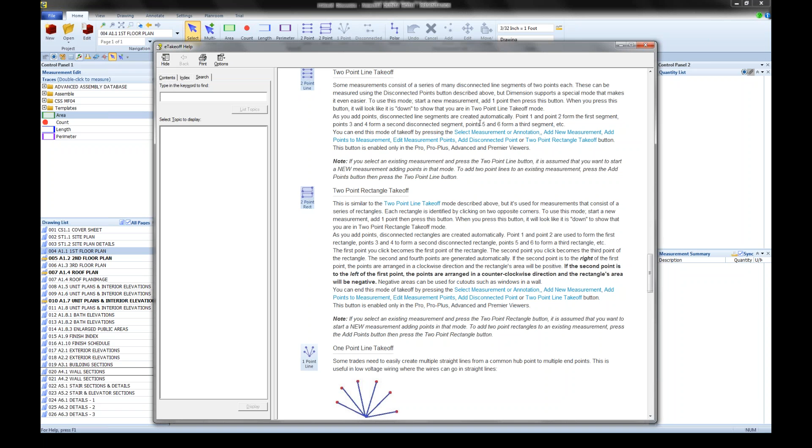If you've used search tools before, we will set you right into the tool or the help system at the most appropriate level. You can also use that on sections, like the Takeoff section, or even on the tabs, anywhere you want. Want to know about the settings tab, how does that work? We'll take you into the settings tab, etc. So a very powerful tool that gives you much more help, more specifically, much more quickly.

Then we also use what's called the Quick Access Toolbar. It's a Microsoft tool that isn't always activated in all software, but we think this is a very powerful tool because it enables you to learn the software. Once you learn it, you can optimize some shortcuts so you don't have to move around as much. Again, these are all things that help you use the software, and as you get used to it, help you become even more proficient.

So the ribbon bar concept is great, but you do have to move to different tabs to accomplish things, and sometimes that gets in the way. What the Quick Access Toolbar does is, for instance, if I'm at settings and I use the Edit Layers button quite a bit to turn this dialog on, I don't like moving back and forth all the time. So what I can do is put the cursor on the button, right-click, and add it to the Quick Access Toolbar.

And now there it is. I can be in any tab, on my home tab, where I'll probably be doing 90% of my work, and jump to that button anytime I want as a shortcut. You can move these around, and notice even the tooltip is still active on those buttons. Of course, you can edit these and move things around. So a nice little touch, something that makes your software more useful to you down the road as you become more proficient.

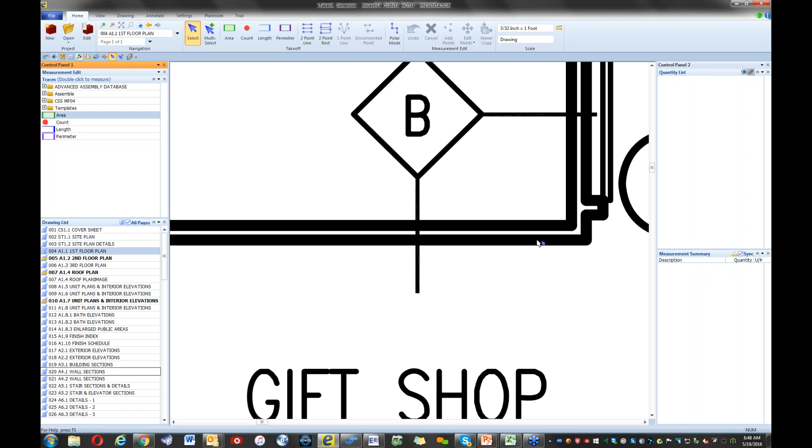I'm using PDF drawings, and if you've ever used a TIFF drawing, you'll notice that when you zoom in, the lines get very fuzzy, you get a lot of pixelation, things break up, etc. Here with the PDF, you get very tight lines, very tight formations all the way through to the zoom level, so you can be more accurate in your takeoff and pointing.

So again, you simply double click over here to change a drawing, for instance. This becomes a very powerful way to use the system effectively so you don't have all this delay time up front. Then next we have the navigation section.

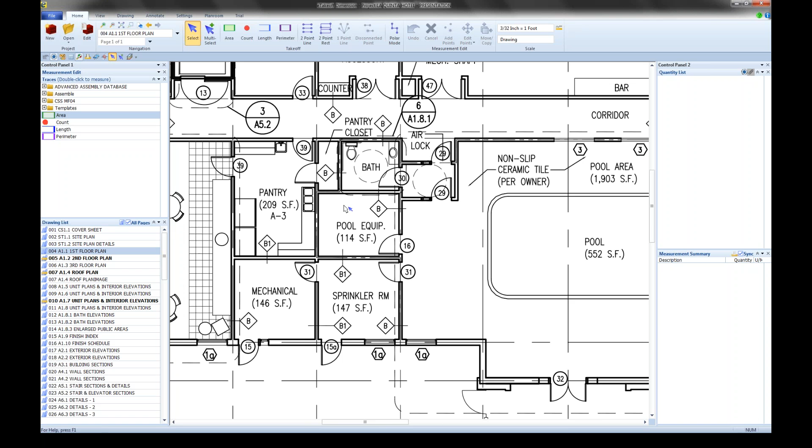There are many navigation controls here, but you may not even use most of them. You can simply get around your drawings very quickly by putting the cursor wherever you want and hitting the wheel to zoom in. That's a very quick way to go in and out of the drawing and move to different positions. If you're zoomed in, you just click the left or right mouse buttons, the cursor changes format, and then you can scroll and pan across the drawing.

So very easy to get around, and that really constitutes most of your navigational work. Although, as I said, there are other tools up here if you want to use them. The takeoff section gets into how we do our takeoff, and the measurement edit section is how we edit measurements after the fact if you'd like to change things.

And then here's your scale. The scale tool gives you standard scales you can choose. You can set up a scale to be a known distance, and then have the system automatically scale to that. You can normalize the scale it generates so it's very close to a standard scale, because you can't be absolutely perfect in how you click on these dimensions. It will automatically scale to a normal scale close to what you generate, or you can just type in the scale. A lot of different ways to get scale into the system.

And then just in terms of use, when we look at how the system is used, we try to set up an interface that makes it easier for you to understand the workflow just by looking at the screen. So the drawing is always in the center, and then we have two control panels. These can be moved—you can undock them if you wish, move them anywhere you want, even put them on another monitor.

We have four of these control panels. The system starts up with two of them, and you can have two more. You can add many different controls and turn them on and off for all of these control panels, so you can customize the look here.

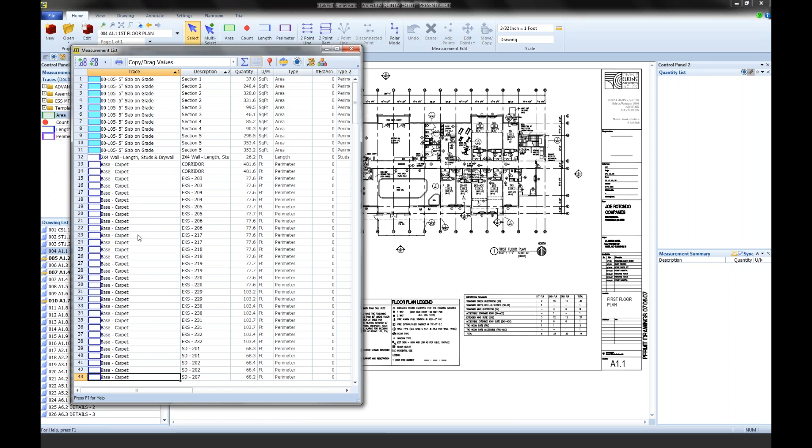So you can create an entire list of reports, different ways to look at your estimate and your takeoff. That's all done in the measurement list, and this crosses all of the project boundaries—it goes across all drawings and shows you all takeoff on those drawings.

So again, the takeoff methodology is clockwise: you take a drawing, select it, double-click on it, select a measurement, go do the measurement, the result is over here, and then going clockwise we end up with the summary of everything on that drawing in the lower right corner. So that's an overview of how the system's used.

It's actually pretty easy to get around, and once you use this for a couple of measurements, you'll start feeling quite at home. So let's start and show you a little bit of what we do here. The issue with software is that the point is to make your life easier.

We're not here to try to make your life more complex with a tool that is difficult to engage with. The idea is to make your life easier.

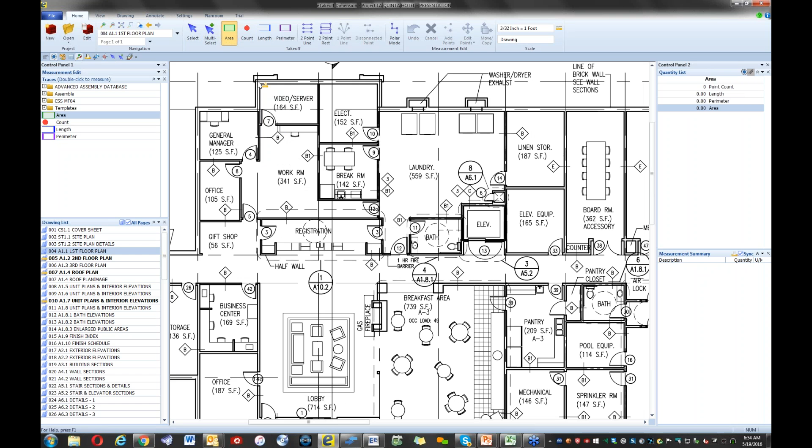I'm going to start with a simple area, and there are many different ways to set this up. I'll just draw a rectangle here. You'll notice when we do a measurement, I have this set up in a freehand form, though you could have rubber banding, or crosshairs—many different ways to set this up. You can set it up so the system automatically goes into a snap mode with different degrees, or you can make it freehand with the click of a button.

This can all be customized by you. You can set up a default so you're always in snap mode, for instance, and then revert with a click of a button to freehand. When you're finished with the measurement, notice this shortcut: I can go out and start another measurement, which will terminate this one. But if I press the Esc or Enter key to stop the measurement, then we are complete, and the results are shown in the quantity list.

So you can see here I have 4 corners, a length, a perimeter, and an area. We always give you 4 pieces of information. And you may ask, what's the difference between the length and the perimeter?

If we look at a room here, for instance, when I start the measurement, notice as I go around, if you're looking for a point, you can simply hold the cursor down and it will let you get more accurate in your measurement. It'll zoom in for you automatically if you want to do that type of thing.

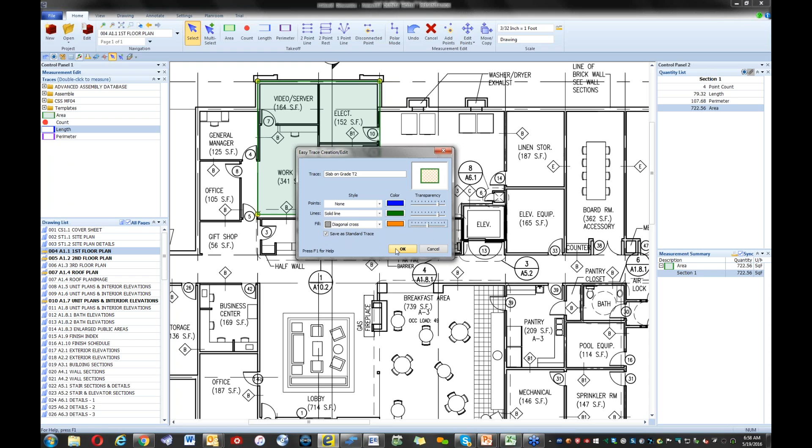What that lets me do is say, well, this is an area, but it really is slab on grade, type 2 for instance, and I'd like to make this diagonal lines, and let's use orange, and modify the transparency a bit. Now when I click OK, this is instantly transformed.

You'll note now it is slab on grade type 2 under section 1. However, what's most important is I've now created a brand new takeoff measurement, a trace we call it. This trace can be used across all projects. It's permanent, it's part of your database, and you don't need to do anything else. You could just use this immediately somewhere else in the drawing.

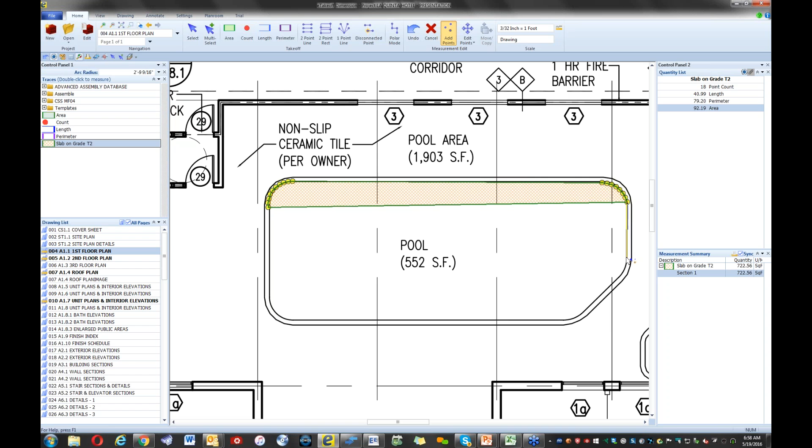Let's go out here to this pool and just double click. Now instead of using the area measurement, I have a new measurement I can use, and we simply go around the new object, the new takeoff. By the way, I'm using the curve capability, so I go to the beginning, the middle, and the end of the curve, then just press the C key, and the system will calculate the curve for you. You have options to set up how many samplings you want around that curve, etc.

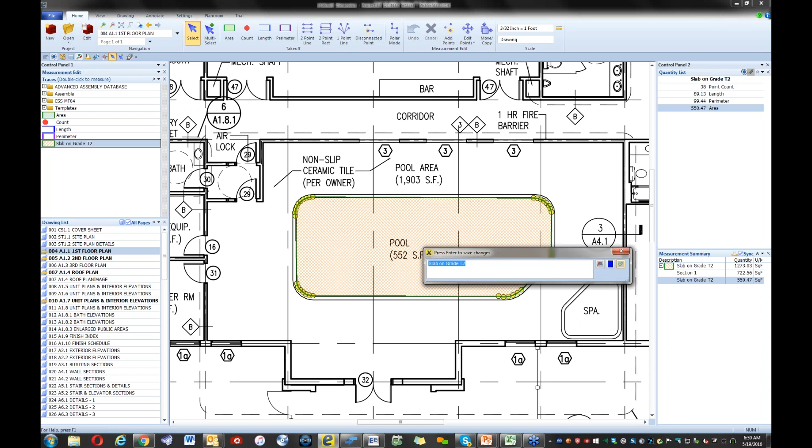There's our pool, and then I can press the D key and say this is section 2 or whatever. Notice now I've got section 1 - double click on it takes me to that measurement - section 2 takes me to that measurement, and I'm already moving along with my own customized takeoff trace. So very quick to make modifications, change things, etc.

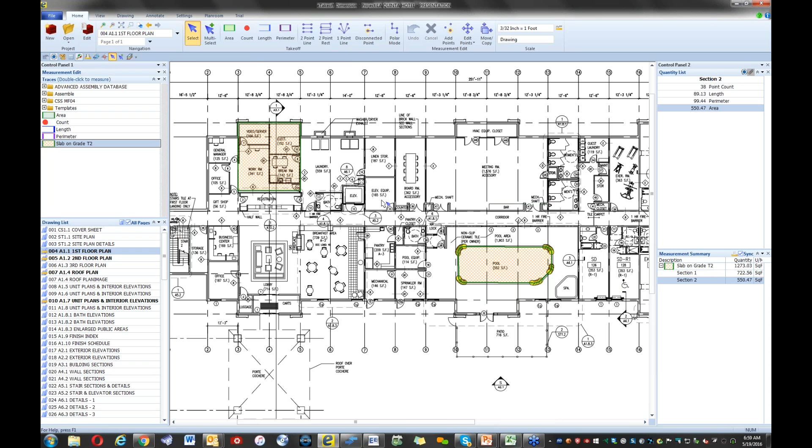Now let's get a little deeper and look at how we can make this more powerful. It's very easy to do takeoff in terms of tracing things. All these products trace - they all do it, or they wouldn't be takeoff systems. So I can't draw a rectangle any faster than the next guy. However, what I want to show you is something not easily available in other systems, and that has to do with our assembly capability.

So let's go to frame and drywall, and I'm going to grab this 2x4 wall. Notice what happens as I do this wall: instead of just point, length, perimeter, and area, I have several other parameters now. I put in the wall height, maybe 24-inch stud spacing, and maybe number of sides too. And let's put in a sheet size, and we will generate the track, the studs, the drywall, and the sheet count.

So you immediately begin to see the power of having a simple takeoff start generating complete estimating assemblies for you, and generate anything you want that you can mathematically derive out of the information at hand. It's a very powerful tool and enables you to do much more powerful takeoff, generate more items.

At the same time, if you're using Excel, we can show you how you can export this into Excel and get the best benefit of having all of this information out there. Many systems will generate just these quantities, and you have to do all kinds of crazy work in Excel to get something done. Here, we generate inside the system, and it's much easier to take that out to Excel if you want, or if you're using an estimating system - and of course all of that stuff transfers, such as Sage.

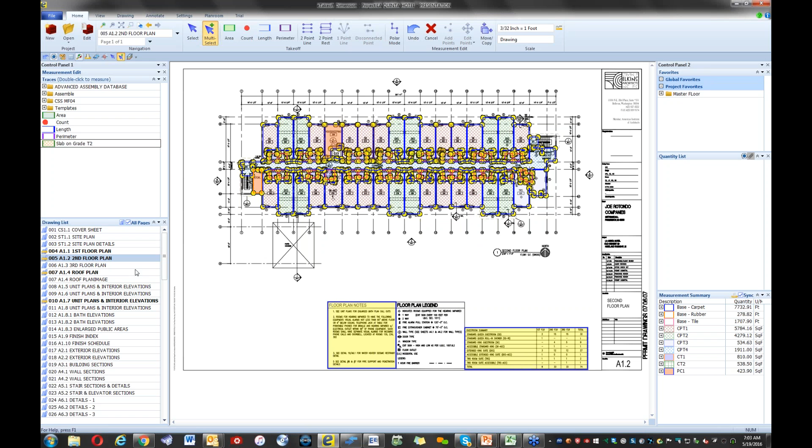And now I have an identifier which represents all these measurements. If I go to the third floor, let's zoom in here a bit, I will grab this entire set and simply drop it over. You see the outline. Drop it in place, and all of those measurements will be transferred over to the third floor. They're all individual, all still there. You can grab each one, modify it, do whatever you want with it. But it's a very quick way to move things around or duplicate things in your Takeoff.

And this can be used in a variety of ways. For instance, you can also go to annotations and say we want to put in a text. Up here, let's say this is approved. Now, once I've used that text here, I can grab it and drop it into the global favorites. Project favorites means that everything you've done here is saved so it can be used anywhere on this project.

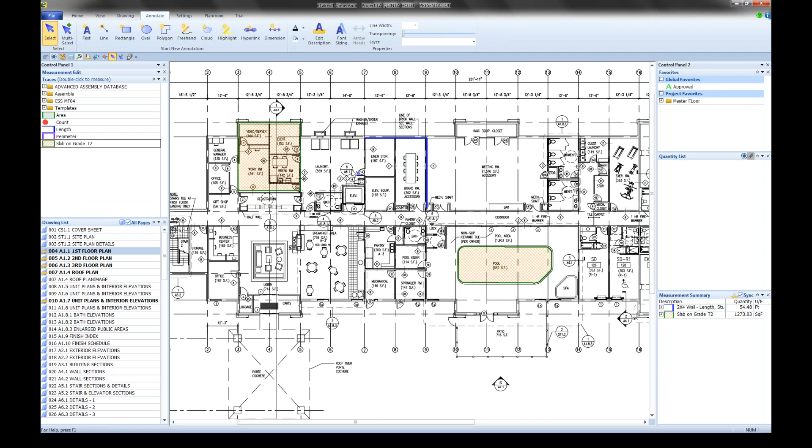However, the global favorite says use this across projects. So as I move across projects, let's go to a different floor, a different Takeoff. I can simply drop this wherever I want, reuse this, build a complete library. Those will be there across all projects. Once stored in the global favorite, it is not relegated to just this project as the project favorites are.

And then another use for the project favorites - when I did this Takeoff, let's go back to our frame and drywall. Note, when I do the Takeoff, I have all of these answers that I need to provide. And as you do that, that provides an opportunity for error, because anytime somebody's typing in things, you've got key transposition and all of these things that might affect your accuracy.

So to remove that area of error, you could simply take that standard wall you're going to be using, grab it and drop it into the project favorite, and say that this is a standard wall type 2 or whatever. Now, as I do my Takeoff, instead of going over to the standards and grabbing the standard trace and double-clicking and having to answer all these questions, I could now use this wall definition, just double-click over here. Now when I do my Takeoff, notice the Takeoff is there, everything's taken off, but all of the answers have been provided because you're using that as a standard wall type, so you no longer have to answer these variables for this particular Takeoff. Saves you a tremendous amount of time, but also saves you from errors, so that's a very powerful tool also.

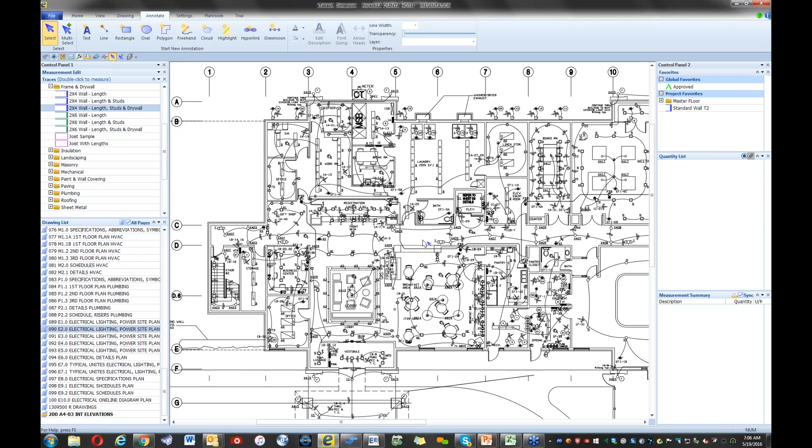Now, going a little further, we'll talk about some other tools. For instance, if you count a lot, depending on what kind of contractor you are - if you're a GC and self-perform, or say you're electrical and you've got Takeoff that you need to perform by counting objects - then it becomes very important to have a tool that lets you do that in a productive manner. The trick with these counting tools, called auto count, pattern search, etc., is the science is inexact. You are not working with a CAD drawing with objects that can quickly be found. You're just working with ink, black on white, really just ink. And so the system has to analyze the drawings to find the matches for you.

And many times as you do that, you'll find some systems simply return the count to you - here's the count, and you have to trust it. As an estimator, it's very important that you can quantify what you see, use the information, trust it, and then go forward. If you can't trust it, the benefit of the automation doesn't help you much. But we know that this is a task that requires an estimator's interaction.

So we're on a drawing here. Let's say that we want to find - let's see, what should we do? Let's go out to fire and security, and we will look for smoke detectors.

So what I'll do is go to our pattern search, auto count, different terms. I'll create a search rectangle, or I can do a polygon to isolate very specifically the parts I want to search. I could search a whole drawing, but then I'm searching all of this text too, and that's just a waste of time.

So we will search by creating a search rectangle, and we'll call this the master search area. We'll tell the system to search within the confines of that. Then I can turn it off by clicking outside of it, and bring it back if I need to. But that's the search area I'll use.

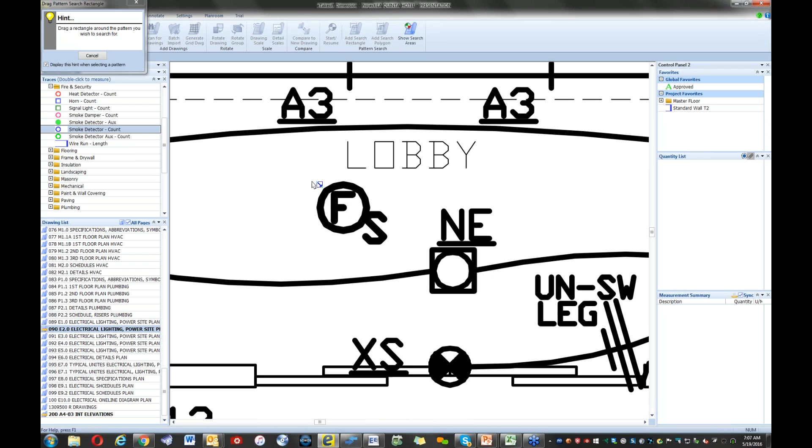So now let's start our search. It says draw a rectangle around the pattern, so we'll zoom in here. Here's a smoke detector for us. We draw a rectangle around it, and the system shows us the pattern we are going to be searching for. I'm going to search immediately.

We can also search in the background, I'll explain that in a bit. We'll use that master search area. We already are looking for smoke detectors because that's where I was when I started. If I click the select button, I have everything available, all the measurement types, and I can count whatever I want to specify. So I'm ready to search.

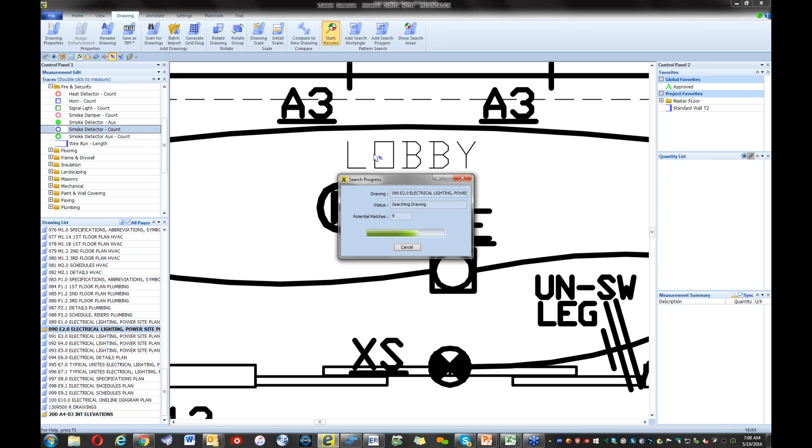So I start the search, and the system goes through and finds every match it can, and presents them to me so I can see visually what I found. In this case, as you look through the list, we have one that's very close but not the same as the heat detector.

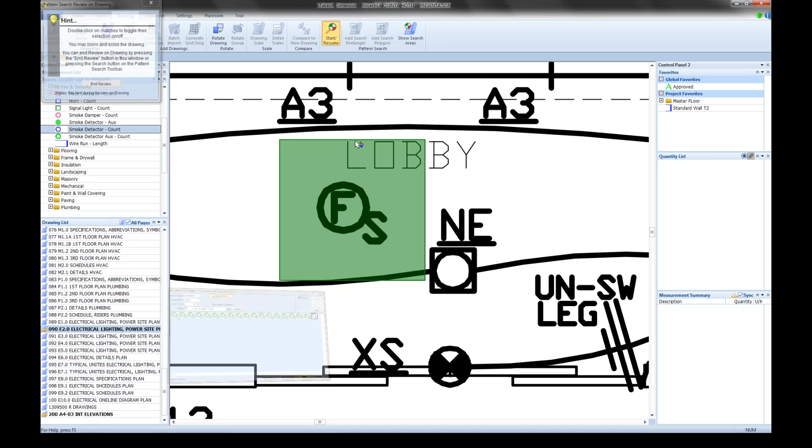So I'm going to turn that off, just click on it. Everything else seems to look good, but I'd like to review this on the drawing, so I get a chance to go out and look at these. You can see wherever they're found - this one here, for instance, in red is that heat detector. I can double click and turn it back on or off, but that's in red because we turned it off.

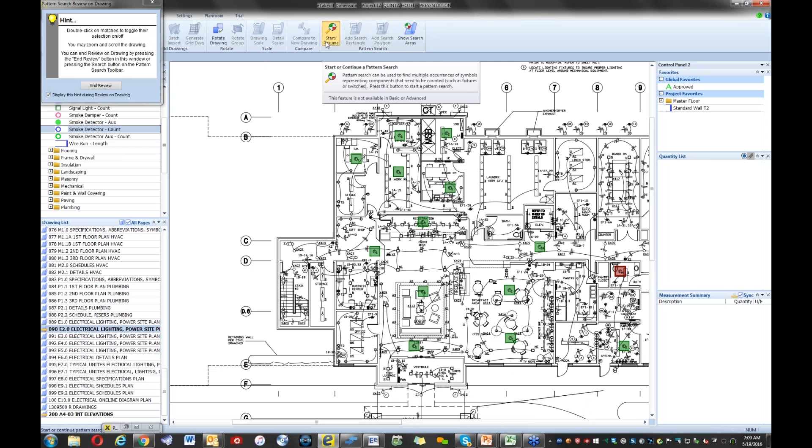So you see every location the system found, but we want to go a little deeper. Let's go back, just resume, and click the button again. The last thing we want to do is analyze this in more depth. So we have a very unique tool here that allows you to expand the display area. It doesn't change the count or the results of the count.

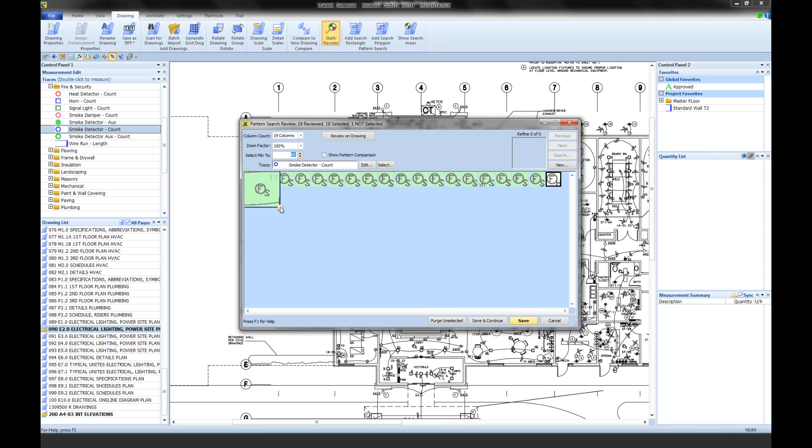It says if you've got wire attachments or cables or something hooked up to a fixture, and you want more information about it, you can expand that so we can see more around each of these things we found, and analyze them in more depth to see if there's something surrounding it that's important, whether it's cables or whatever it might be.

In this case, as you search through, you notice one of these is different from the others. Again, because I made my search so tight, you miss this SA, which is really an auxiliary smoke detector. So I need to turn that off too. The rest of this looks pretty good.

Now, in a lot of systems, when you save this you would then have to start completely over to search for your heat detector, and then start all over again with your auxiliary, etc. But in our case, we can say, let's save and continue - save everything you've isolated as a smoke detector. There's your count. Then we come in and say, let's look for the auxiliaries.

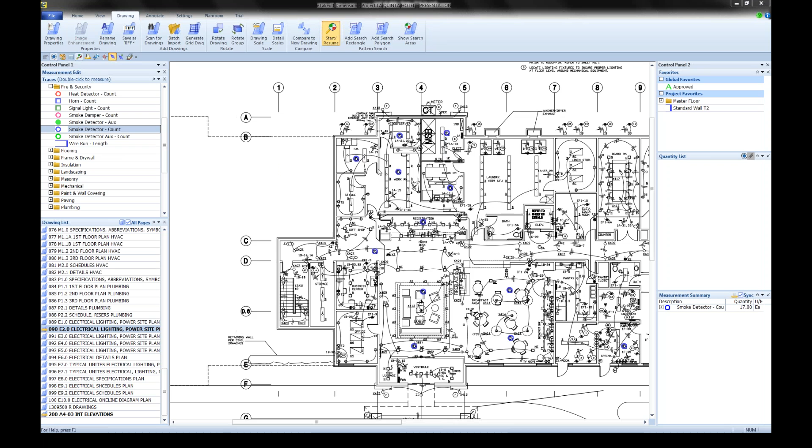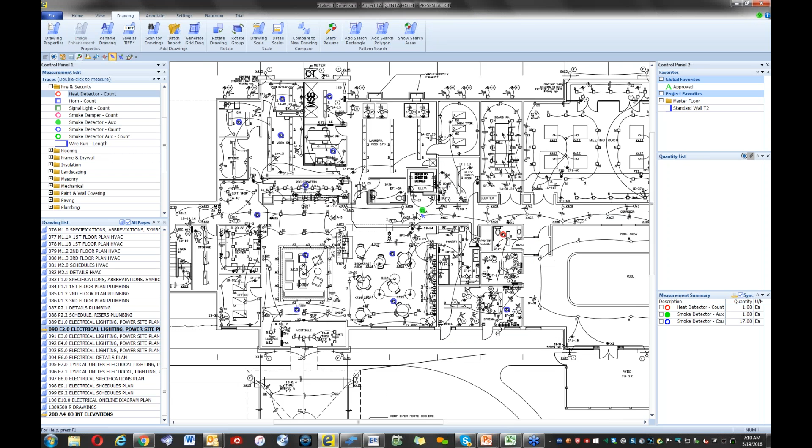So I'm going to go out here and select my auxiliary smoke detector, and we will save those. I'm left with my heat detector, and I will find my heat detector symbols and save those. Now we have our counts, and you can see across the drawing, color coding and so forth of all the symbols it found. This is a very powerful way to do a search, and not many systems do this in the same manner.

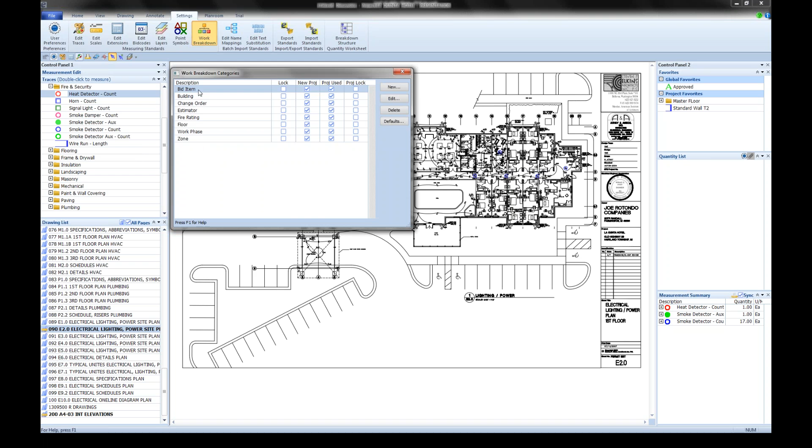Now maybe just one other thing here. Let's look at WBS codes. We have a very powerful tool for setting up WBS codes that lets you code everything you do in Takeoff with different codes that you can set up: bid item, building, change order, etc. And as you take off, you can create and open the work breakdown tool, which lets you see everything you're doing in your Takeoff, and allows you to code it.

So if we go back here for any of the Takeoff we did, you'll see the master list of work breakdowns. If you want to isolate these differently by job, you can do that, so you only see a subset. And then you can fill this in either automatically, by having it default based on the measurement you're using, or you can fill them in at the time you do the Takeoff.

So you can go in here and say that this is change order 2, or whatever it might be. You could also code this differently. You could say maybe this is... let's do a zone, 35 or something of that nature, and code it.

And as you code this information, it's encoded in all of your Takeoff throughout the project. You can then sort this down and look at it in different ways. Let's go to the second floor and select very quickly one portion of the Takeoff, and for that particular section we want to say this is zone 55 for those objects. So these are all categorized as zone 55 at this point.

I'm going to turn off our favorites here, and I'm going to open up the filters. So the filtering now says... and we'll turn off our coding here, and go back into single selection mode so we don't see that anymore.

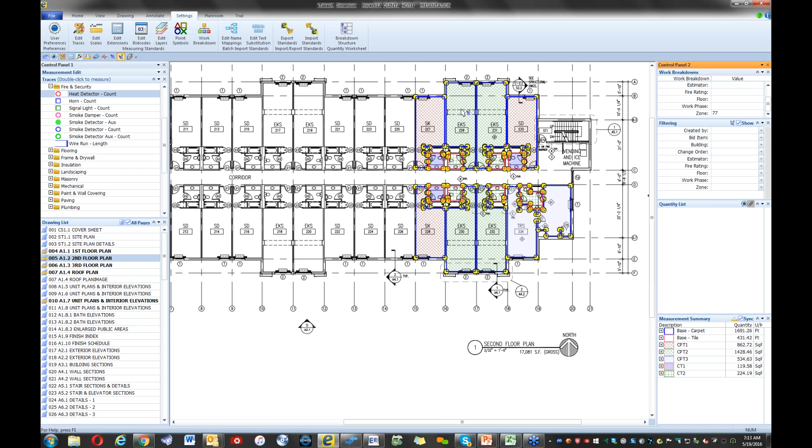So it's a very, very powerful way to organize the information in your Takeoff and still filter and see that information differently on your plans. That's a complete WBS structure, which again is unique to our product. We don't know of anybody else who does WBS code filtering and so forth.

Can I interrupt you for one second? You bet. The one thing with pattern search is also that you can search multiple pages. After Curtis was done, he could have asked eTakeoff to go to the other electrical drawings and count all of the heat detectors and smoke detectors on those pages, and it would actually run through that counting in the background while you were performing your WBS work.

Yeah, thank you, that's a very good point, I forgot to mention that. We not only do all the work that you saw in the pattern search, but we uniquely are also able to do that in the background.

So you can do as many searches as you want initially, just as Rob said. You can select 5, 10, 15 different searches across as many drawings as you want. You get to select the drawings, etc., for each search, and then just say go, and it will search in the background throughout all of those drawings while you return to the foreground to continue your Takeoff work. That is absolutely unique and a huge time saver.

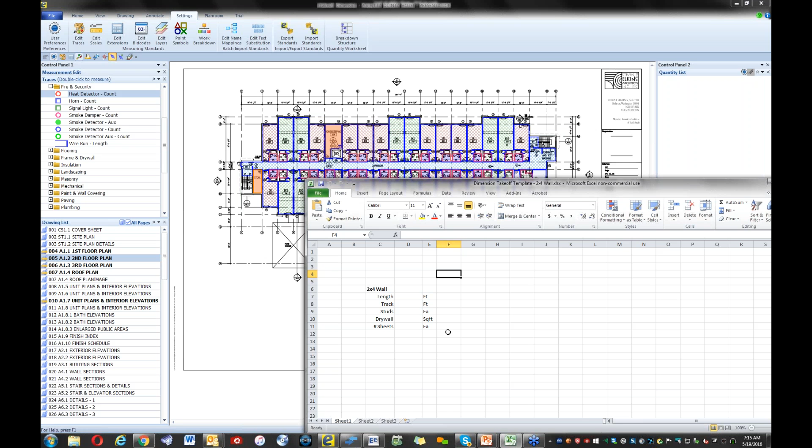Then let's see, I think what I'll do very quickly here is show you a bit of how you can get to Excel, if you're using Excel and not using Sage Estimating. A lot of people claim to have Excel integration, but how you do it is what's important, because just because you have it doesn't mean it's easy to use.

It just means you can click a box in marketing and say, we integrate to Excel. Then you find out when you use it, it's a nightmare. Well, we've tried to set this up so it's easy to do and very powerful at the same time.

So instead of just getting a measurement and so forth, if you're working with this assembly, you can transfer all of this information out. You can create bills of materials. You could create the takeoff structure in terms by assembly. A lot of different options for you.

But here's how it works. It's very simple. I have created a template, an empty template, that defines this 2x4 wall. This is just text, I've just typed these things in to relate to what we have up here. But when you actually want to set this up, what you do is you set up your complete template just like this, and then you start filling this.

For instance, in this case, I want to use the length in that 2x4 wall, so I'm going to grab the length up here, and we're just going to drop that into Excel and put it right here.

You know what? I probably have already created this template. I'm sorry, I had actually been playing with this earlier, and I had created the links to this so that these links are actually in the project.

Normally, when you create this, it will create an empty link here the very first time, because we want to save this as a template we can use over and over. But because I've got this set up for this project, it already knows the numbers, and so it's dropping them in as I grab them.

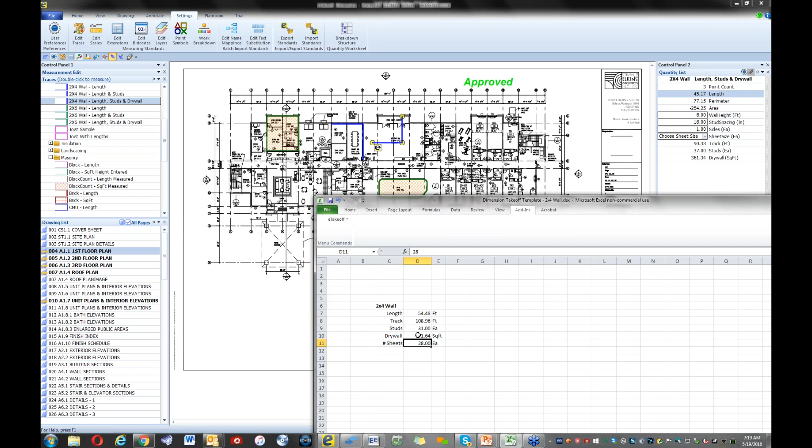So to create your initial spreadsheet template is very simple by just dragging and dropping things in, and once that's set, you can reuse that template for any other job in the future, and it will summarize and total things by type, etc. Or of course you have complete freedom to separate those things out and make them individual.

So let's talk about one more thing. Let's talk about Bridge. This is the tool that, if you are using an estimating system, is a very, very powerful way of integrating information over to Sage.

So let's go out to a takeoff that I've pre-done here. I've used in this takeoff another set of takeoff tools that is also part of a Sage database. You can get Sage databases that are completely preset, and all of this information is all set up inside eTakeoff and ready to be used.

So in this case, I had done this same thing. I have a very simple assembly here, and you'll note that I'm creating the same type of object, and it's a very simple assembly with a concrete strength and wire mesh, and I just pre-did several of these little slab sections. So you can see as I move through these, I have the concrete strength, wire mesh, and that spec is changing. Some are 4,000, some are 3,500, etc.

So this is simply some takeoff I've pre-done, and the goal now is to get this over to Sage Estimating.

So instead of printing all this out and typing it back in, we want to use a tool called the Bridge. When you start Bridge, it's a separate program that runs between your Takeoff project and your Sage estimating system.

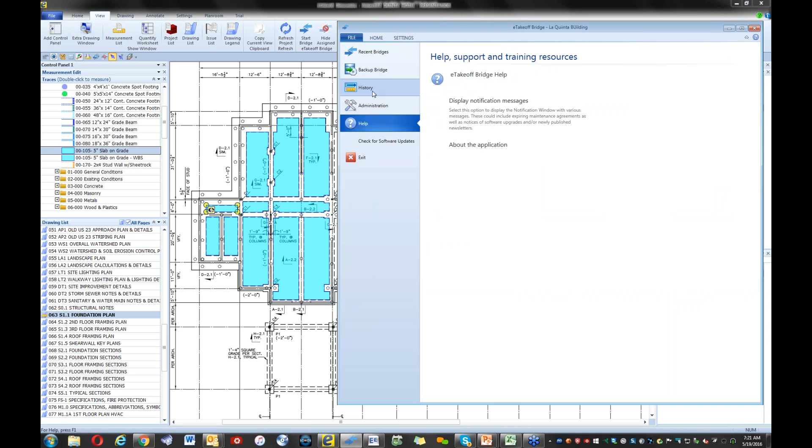Now I'm going to go out here to the assembly and look for that same assembly I used when I created this, a 105 slab on grade, and there we have it. Let me check one thing here, I want to check to see if I have history assigned here. I don't, and this is good.

So now what I'll do is grab this measurement and send this over to the Sage system. All I need to do is grab the measurement and drop it on that assembly. When I drop it on the assembly, Bridge goes out to Sage, finds the assembly, shows you all the information needed, and then in this panel shows you everything related to this particular measurement.

And so, as you saw over here, the length, perimeter, area, concrete strength, all of that's reproduced here. Your count, your length, your perimeter, area, 37, and so forth, even the concrete grade, wire mesh, and so on.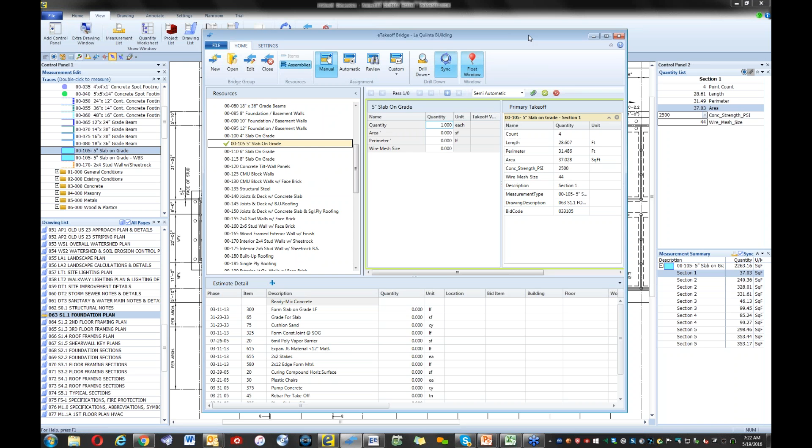What I need to do the very first time in Bridge, since it's a learning system, is teach it the relationship between things so that it knows what to do in the future.

So Sage is asking for an area, and I have an area, so I'm simply going to take that measurement and drop it in. It tells me it's going to use and map the area, and it's color-coded to help me see that. I have perimeter, let's use that.

If I have nothing else, I can just start filling in the spec like you would do over in Sage, and say it's 4,000 psi concrete or whatever it is, all the helps there, etc. Or if you do have that information in your Takeoff, then you can also just map that. So if you want to, you can map all of it.

And then all I have to do is say add the pass. It generates all the quantities, and then I send this off to Sage Estimating, and that's now in the estimating system.

Now, to continue, I could grab a set of 3 of these, for instance. Let's go out to our multi-select, grab 3 of these next slabs, drop them in, and you notice it actually builds a set of 3 of them, right? They're all set.

You can actually aggregate these, so you can have maybe one assembly in Sage Estimating that represents much more detail over in your Takeoff system, so you don't have a lot of that extra information over there. You can consolidate it on the way over if you wish. That's one way to do it. You could do it this way too.

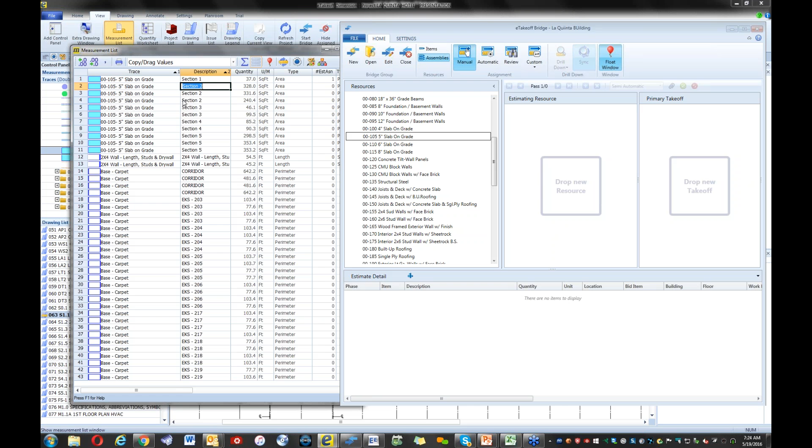You can use that measurement list we looked at earlier. This allows you, instead of just working by the drawing, to sort this so you can see all the Takeoff across all of the project, so you can get all your slabs together in one spot. Then you could say, let's take these 3 section 2s from wherever they are and drop those in, and now I have all 3 of them again set up.

But I don't even need to do that. I actually don't have to go back to the drawing anymore. The truth is that Bridge now knows how to handle this. It knows this object because you've done one of them and told it what to do.

So if I go to the automatic mode, it will find them for me. And it says, here are all the slab measurements that you have taught me how to use. And I could flip this around and say, look at it by the Sage assembly and see all the measurements, or I can see each measurement and where it's going to go, your choice.

And in this case, there are those 3 section 2s. So I'll grab those and drop them in. And in this case, I'm going to add all 3 of those together.

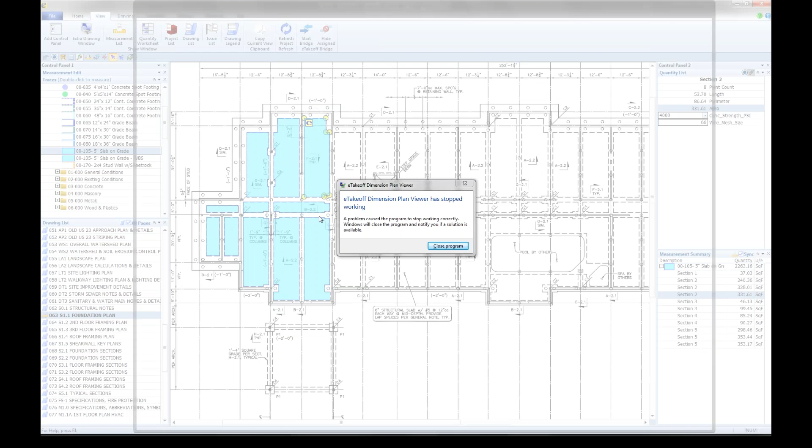Run into a problem here. I've got a message in my background here, but I can't quite get to it. Let's see. I'm right in the middle. Actually, we'll see how well our database system works if I kill bridge here and start over. Let's take a look at what we had there for a message. Oh, I see, something stopped in the background. So let me start that up again. And we will fire up bridge.

And I think we're back in the running. We have our 3 passes. We'll add those 3. There we go. So let's just keep going. You notice everything was saved in the database, so whatever happened there, we are well on our way to continue. So now you can see these 3 passes, and you can see that it isolates them for me, each of those particular pieces, as I move back and forth through this.

Now I'm going to do one thing different, and I'll show you this, explain it in a second, but let me make this fully automatic. And well, let's just send this over to the estimate. And what we'll do then is we'll now go into what's called the review mode. I'd like to see what I have sent over to the estimate.

In review mode, it shows me the 4 takeoffs I've done. So you can see the takeoffs listed here in review mode. That shows me anything that's in the estimate, as well as I can click what's called the hide assigned button. This button will show me.

Curtis, yes. Curtis, we're not seeing the bridge screen for some reason. Oh, let's see. We're seeing the drawing in the slabs, but the bridge screen, we're not seeing that for some bizarre reason, don't understand. I wonder if we can refresh and take it back and then make me be the presenter again, would that help? Or let's try this. No. Can you see it now? No. Okay, so maybe the presenter can make me the, yeah, try me as a presenter again. You still are the presenter. Ah, now it's, can you see it now? No. There you go, still can't see it. Okay, now you see it. All right, back, there we go.

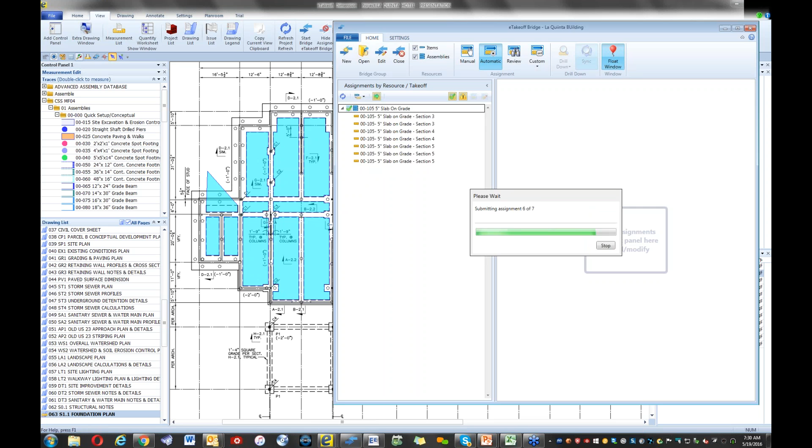You can also go into the automatic mode, and because I had made this automatic earlier, you'll be able to see everything else that the system has found. If you categorize it as automatic, you can literally send it over to the estimate automatically with a click of a button, and all of that takeoff is done because Bridge knows what to do with it.

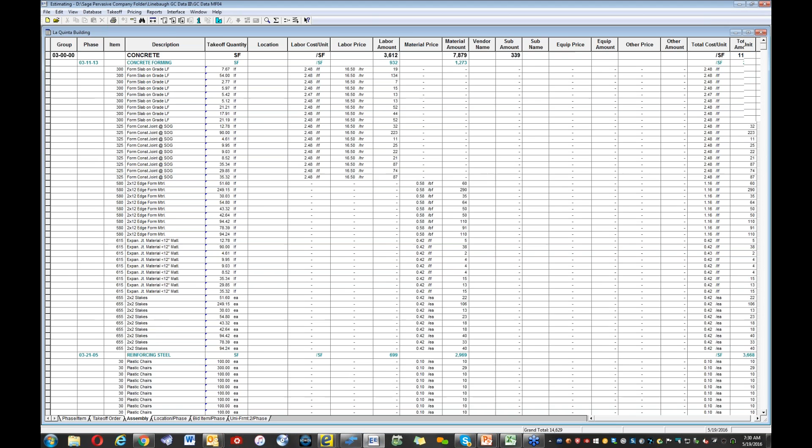So if we close this and go out to Sage Estimating and open up that La Quinta estimate I was working with earlier, you'll see all your takeoff. Let's go into assembly order here, and now you see everything, all the takeoff, all the slabs, etc.

You can review any of these. This is the one that had the 3 passes, you'll note. All 3 passes are outlined, and you have your audit trail that shows there were 3 pieces here, aggregated together into one assembly.

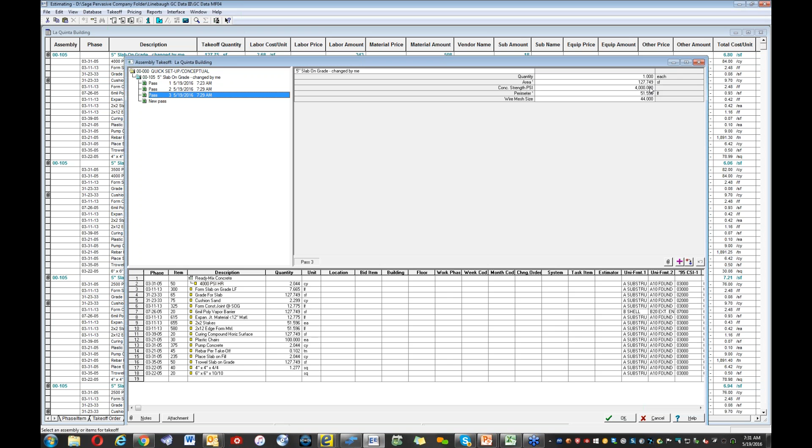Or here's the one that we did that I changed, and I can see right on the spreadsheet that it was changed by me. When we review that, we see that at 723 we had 37 square feet, 2,500 psi concrete. At 729 we negated that, and then it became 127 square feet and 4,000 psi concrete. So again, a complete audit trail of everything you're doing.

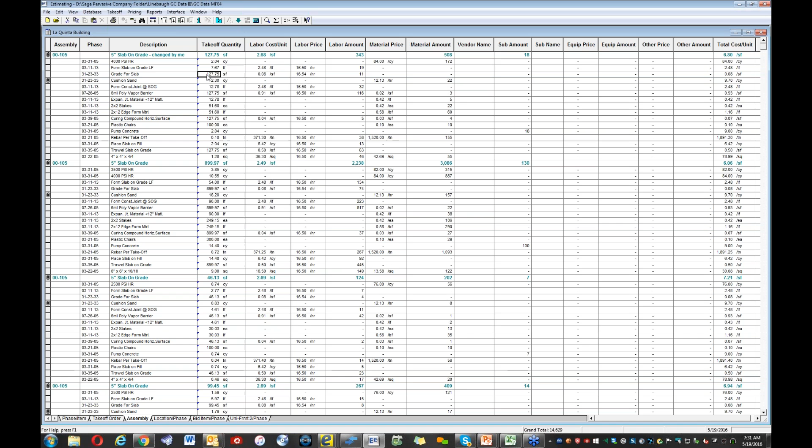Finally, let's say you're in estimating and you'd like to take a look at this object because you're not sure exactly what was going on. Every cell that has this little blue triangle basically says this came from Bridge, it came from Takeoff. If you'd like to, you can simply review it by drilling down to Bridge, and Bridge will open up Takeoff, find the object, and then open up the details and show you what's been going on with that.

So that's a quick overview, very tight timing here. Sorry for the technical difficulties, but basically you've seen eTakeoff all the way through basic takeoff functionality into assemblies. We've talked about the favorites tool, WBS coding. We've seen things go to Excel, as well as the Bridge tool, which takes everything out to Sage Estimating. It can automate your entire process in turning that over to Sage.

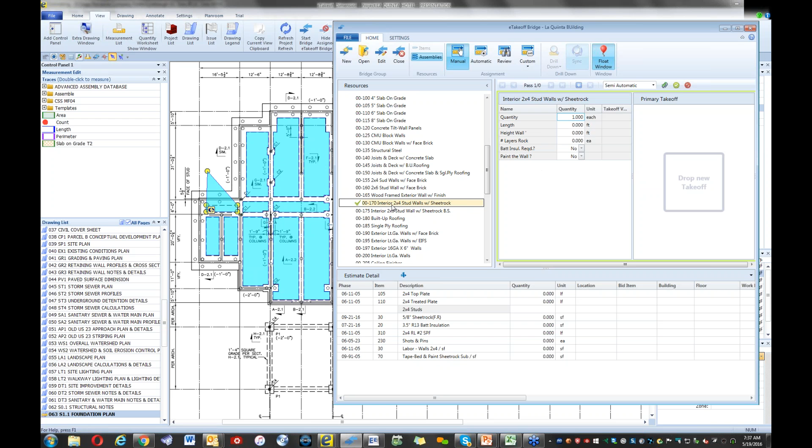Here's an assembly over in Sage. These can get more complex depending on your situation, but this is a very simple assembly, called up right out of Sage. I have the ability, if I'm setting this up and customizing it myself, to grab that and drop it over here and say that's a wall—typically a length—so we drop it into the length, and we give it a special name.

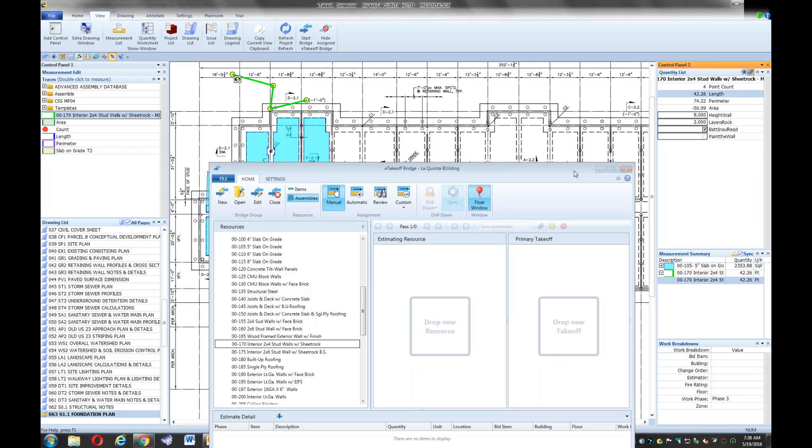We'll say this is mine, or whatever, and even create the extension, which makes it an assembly, give it a different color if we want—let's make this one green, just so we can separate it. When I click the button, I have a brand new takeoff element, a trace, with the very same name as in Sage, and I can now use that in a measurement. You can see over here it has the very same prompts that I do in Sage. Everything's already set up, brought right over, and then I can take that and drop it right into the interior stud wall, and everything's there for me to map.

So if I need my length, we grab our length and teach it—it's the first time in. There's the height of the wall—let's grab that height—and our layers of rock, and our batt insulation, and our painting of the wall.

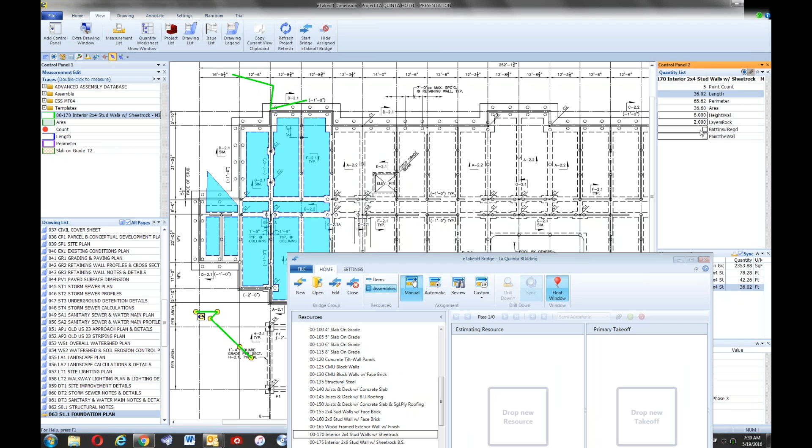Now I can compute this, get the quantities, send it off to Sage. The next time I want to use this wall again, I could go out to automatic mode and it'll find it for me, if it's out there and taught. Let's go back here and use it again and see what we get. Oh, the reason we didn't find it is we didn't fill in all the results, so we have to fill in our spec, etc. Now if I go out to automatic mode, it actually—let's see here—well, I'm not finding that right now. Let me see why not.

Oh yeah, there it is. And you notice everything is already coded now, everything's mapped, and I'm ready for that production mode. I'm ready to go on. So you can very quickly use some of the tools in the system to actually build your library up and match what you have in Sage. And then there are, if you're a new Sage user, complete databases set up in Sage that are completely set up in Dimension also, with all of the same attributes and measurements, all mapped out.

You literally are ready to go day one, start doing your takeoff, and send it right over to Sage. If you don't have a Sage database and you're not using Sage but decide to, we already have all of our data mapped through Bridge already. And we can help you map your data through Bridge if you'd like us to.

Any other questions? Yes. In the building field, can we enter an assembly number, example 4 GLO 1000? Yes, that numbering scheme is totally up to you. So what you see here is what this particular database is set up with, 00-120.

But here's another example of a database. Notice this numbering scheme is completely different, different structure entirely. So it's totally up to what you want to set up as to how you want to number things and name them.

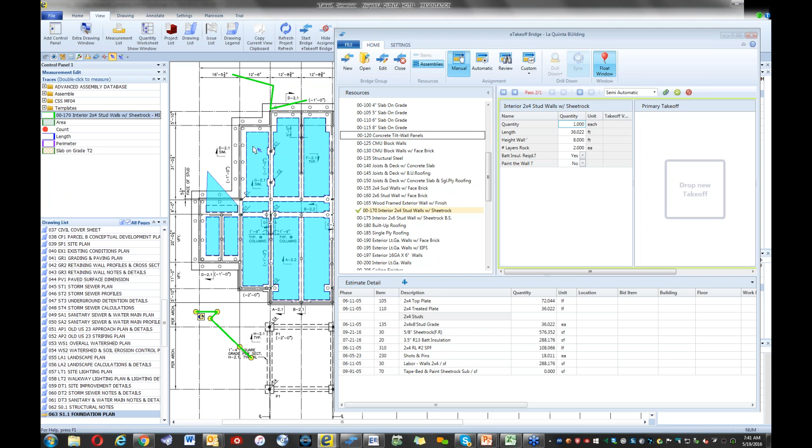Well, you create the template once, and after that template is created and you drag those dimensions in, it remembers that linkage. Now the next time you have a new job and you're in Excel, you can go to our add-on on the Takeoff side, select the current project, pick your new project, and that project is now linked. And if you do your Takeoff, all of the stuff you've set up, every structure, every link, will automatically already be residing there.

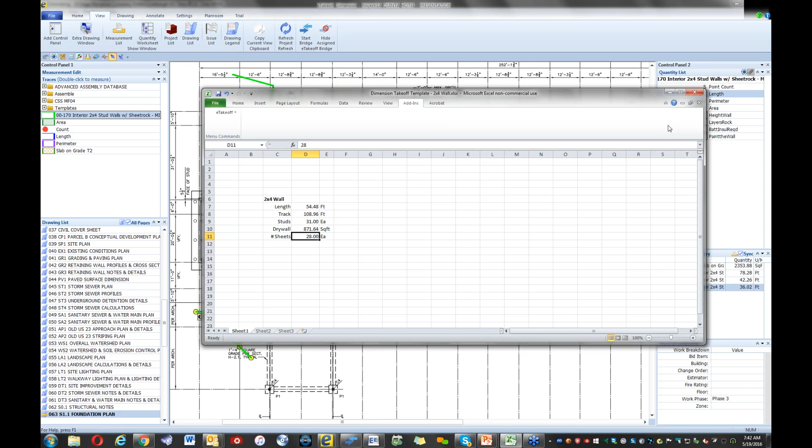You no longer have to create this structure. It can be reused over and over, so you can have as many spreadsheet templates as you want that you can reuse. Once you've created it the first time and dragged and dropped the specific values in, it can be reused over and over automatically. You never need to modify that template again. That's how it saves you time. First time you need to create it, after that you reuse that template as much as you want, and it will function for the project you select.

Okay, next question is, we use Sage to integrate with Builder MT, both single family and commercial. Any experience with the product in this setup? Main use would be lumber, flooring, trim, electric to start.

Yeah, Builder MT, there are a couple things. Builder MT has looked at Bridge extensively, and of course, as you use Sage Estimating with Builder MT, if you're using Sage Estimating, then everything you've seen here applies to the home building industry also. Now they also have their own tools over there, and they've done some integration work with Bridge into some other, I think it's an add-on tool of the type they sell. So if you contact Builder MT, certainly they have some knowledge of how Bridge works and how it works in the specific tools you have with Builder MT.

So there is knowledge there, and I would suggest just contacting them, or you can work with Rob through Builder MT. Rob knows the people at Builder MT also.

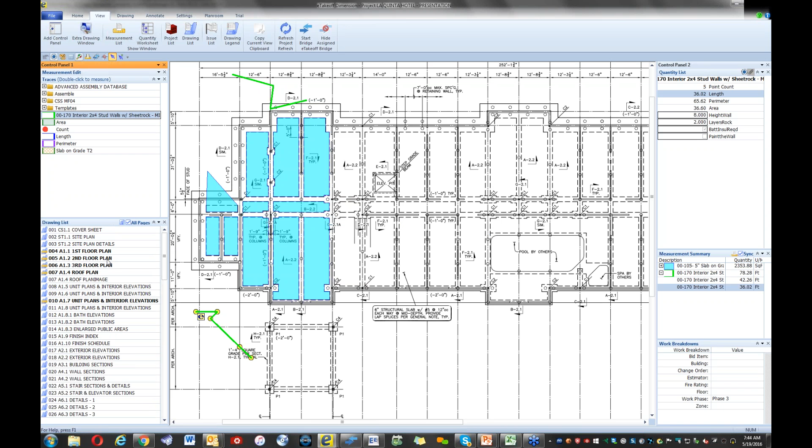Okay, if I have a list of multiple items and Takeoff items, how can I drag and drop all these items at once? Well, if I understand your question correctly, remember I was able to do that here, where I dragged everything from the second floor over to the third floor.

And the trick there when you're looking at things to copy or move is simply a matter of, am I in this mode, which is the multiple or individual select mode? If I go to the Home tab, these are bigger buttons. Multi-select simply means I can select multiple objects, or I could draw a rectangle around all objects and grab them, or I can use the WBS code to find everything coded the same and select it, or I can individually select just one item at a time.

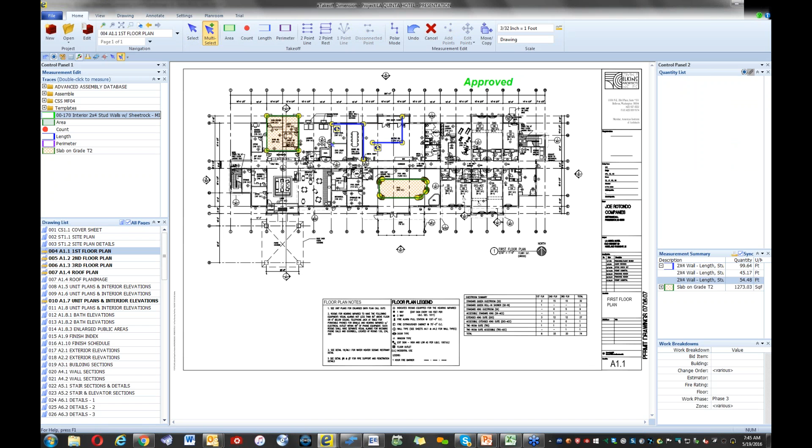So there are tools available to change how you grab items, multiple format. Again, if I wanted to grab all of this, I could go to the multi-select, grab it all, or I could just grab parts of it, right? Or just select individual pieces if I want.

So again, that's all set up in the tools, but there are also tools, as I showed you before, with the favorites, where you can drop multiple things and copy them, etc. And then also the WBS coding, which allows you to find things that are pre-coded and then select them all in a group based on the coding you already have in the Takeoff. So multiple ways to select multiple items and then copy, move, change, etc. And you can use the move copy command to do that, to move things around and reorient them and so on.

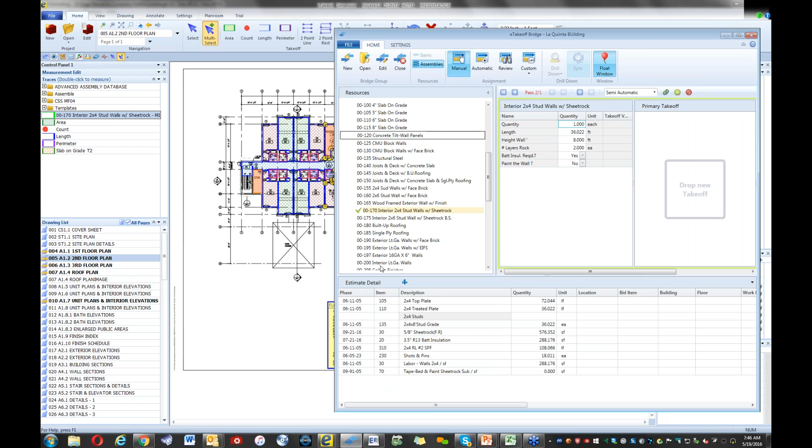Well, as you saw, if you're using a database from Sage, then yes, you can get everything completely set up, including the entire library of Takeoff, and it's all linked through Bridge and completely set up to go. If you don't, and you're using your own database, as you saw what I did earlier, I actually created, just by dragging something out of my Sage database, a new Takeoff trace that I could now use, and it has all the elements that Sage has. All the variables are listed here, etc. So you can use the tools in Bridge to help you create your list if you want to customize it.

If you are using a Sage database, then you can get databases with Sage that are completely set up, everything all the way from Takeoff into Sage Estimating, and all of the Bridge mapping is done and so forth.

Okay, the next question is, would I use the summary items box to drag and drop all items into Excel? No, not the summary. Well, we may just be having a difference in terminology, but if I go out to the measurement list, which is this, I also am able to take everything that you see here and just copy it. I can put it into a Windows clipboard or whatever, take it out to Excel, take it out to Word or whatever, and drop it in.

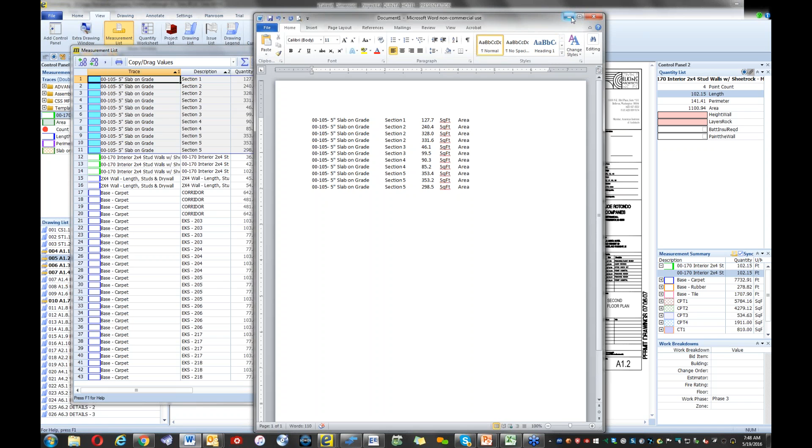Again, you have that ability to take out of this list. You can summarize things here, reorganize them, sort them, etc., and then just copy paste anywhere you want in any other system that allows drag and dropping, copy pasting.

But if you use the tools specifically as I was doing it, then you can actually set up templates also, in Excel. And then once you create the template, that becomes your master. You just copy the template, give it a new name for that project, and then you go into the Excel interface, grab our eTakeoff add-on, select your current project you're starting, and from that point forward, that project's linked to that spreadsheet, and it updates all of the fields that you've set up in the template you can reuse.

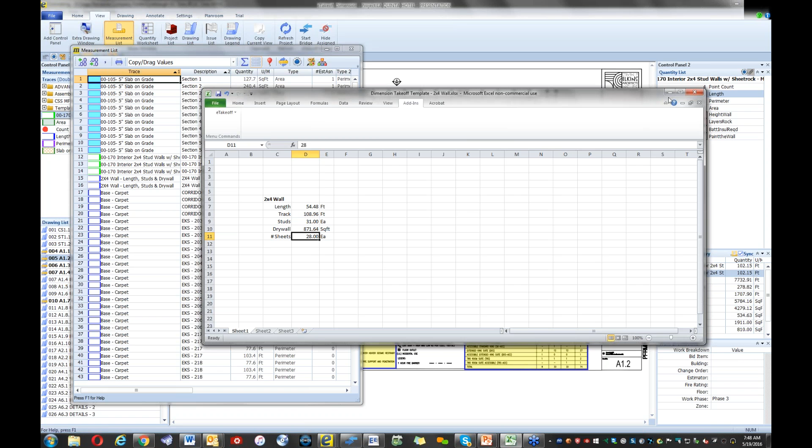So yes, you can either use the Excel integration, or you can copy-paste anything out of your reporting. And again, as I said, you can insert new columns, you can customize this thing, save the configurations, and then you can have a whole host of reports that you have set up. And then, as I said, you can copy, drag anything you see in here. In fact, you can take the entire sheet and copy it if you want.

Okay, anything else? Next. Yep. What is the difference between the advanced and premier versions?

The premier version primarily has the following capabilities: assemblies and the pattern search. So the pattern search and the assembly capability are the primary differentiators between the two products. There are other odds and ends, and we can go through that list with you, but the primary things are the Takeoff assemblies and the pattern search.

Now, advanced, if you mix and match the versions, for instance, if you get one copy of Premier, which allows you to set up, let's say, all of your assemblies, then you could, for instance, purchase one copy of Premier to enable you to set up the assemblies. Once those are set up, there is a function within the system that allows you to, we go into settings here, import and export standards. So you could export those standards from the lead estimator, let's say, who's responsible for modifying and creating the assemblies.

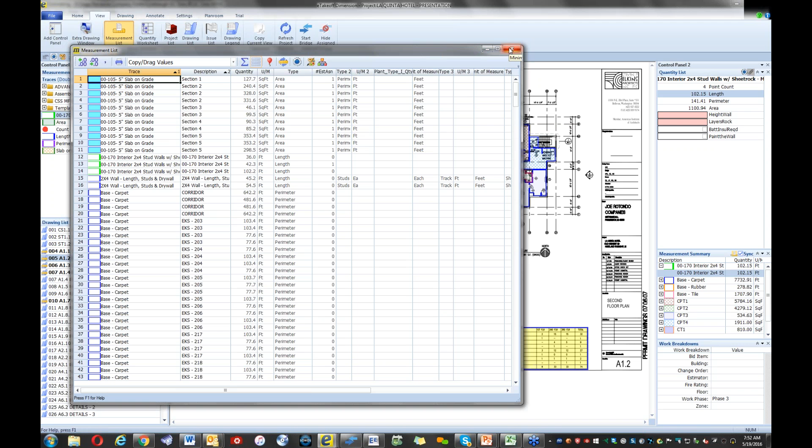You can save these configurations, summarize things, and all of this can be reorganized, sorted, and saved. This becomes your primary reporting methodology. If you wanted more, I'd rely on Sage Estimating's reporting, or Excel, for instance—you can use that as your output reporting too. But as far as all the measurements and so forth, that can be done through the measurement list.

Are the prices listed one-time fees? What is the annual maintenance cost? The prices listed are for a one-time software purchase—you purchase a license for the software, and then about 20% is the annual support and maintenance fee, which gives you Sage full support by phone and email, as well as all the updates you get while on a Sage support plan. Rob, anything else on the Sage support you'd want to add?

No, that's what it is—unlimited telephone support, maintenance, enhancements, upgrades, and updates to the software annually, at 20% of the price of the software.

By the way, just as an aside, the bridge is an optional module, and that is $500. So basically, if you invested in eTakeoff Advanced, it would be $1,450 including bridge to Sage Estimating, and the Premier version is $2,395, which includes the Premier version and bridge to Sage Estimating. We can talk more about that offline individually, and I look forward to it.